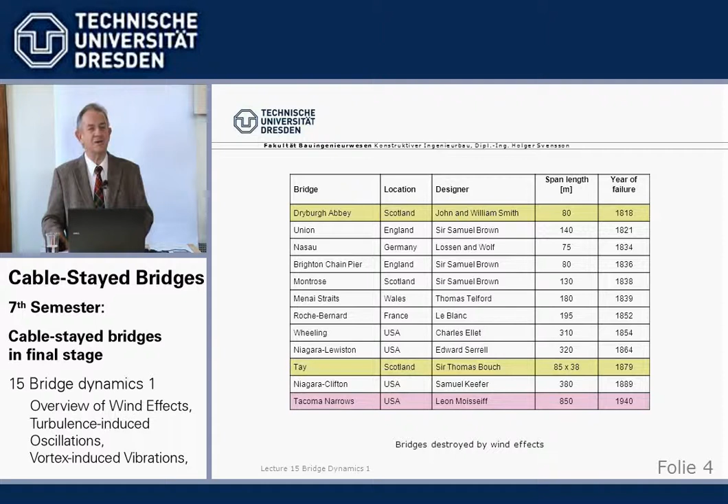So it all started with Tacoma. And to my amazement, in former years, I found out that you had never seen the famous movie of how the Tacoma Bridge in wind failed. I will show it to you again today.

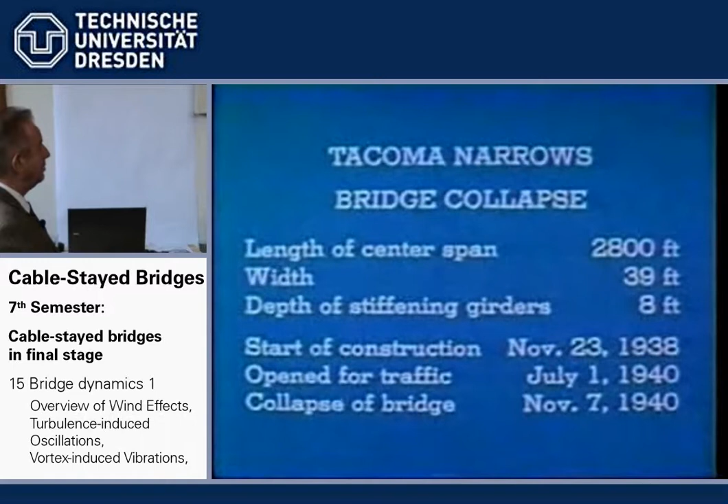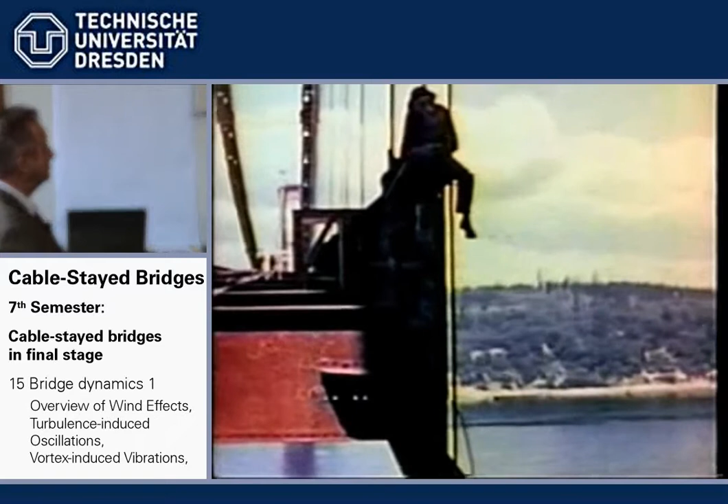At that time, it was one of the largest bridges. Steel girders, 8 feet tall, which were supposed to stiffen the bridge against the bending. However, some up and down vibration was observed during the entire useful life of the bridge, which was rather short. Here's opening day.

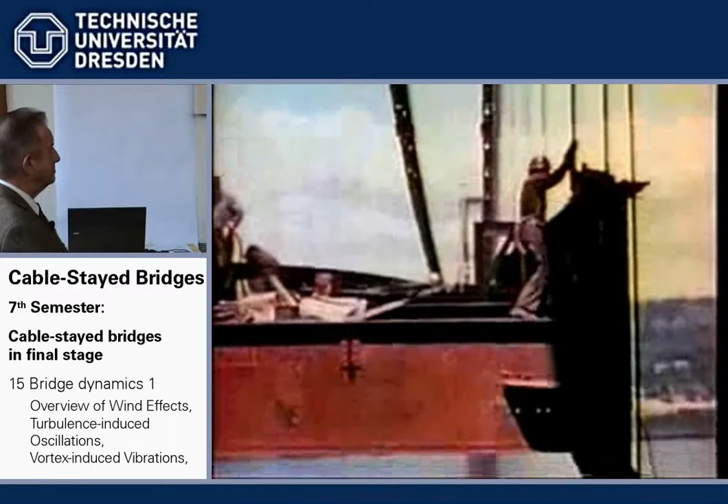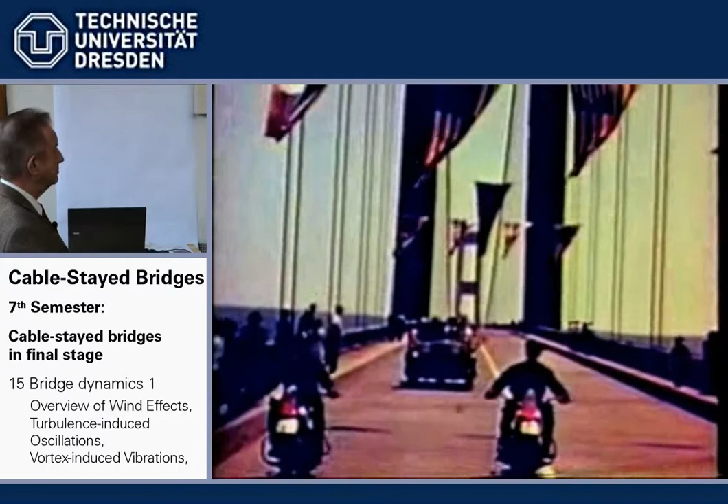Since the bridge moved from the very beginning in the wind, it was investigated by the University of Washington. Suddenly it went into a twisting motion, and there was a movie camera to film that disaster. The bridge oscillating in one of its natural modes of vibration with a period of 5 seconds.

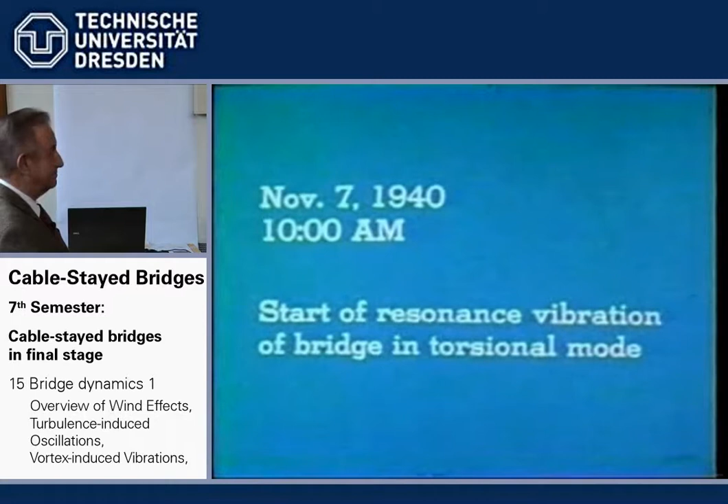Torsional galloping. You will hear about it later. But it's a real effect. It's nothing theoretical. Bridges can fail.

It's pumping more and more energy out of the wind flow into the bridge. With this flexible - this is photographed at normal speed. However, the collapse was inevitable after a little more than an hour of this.

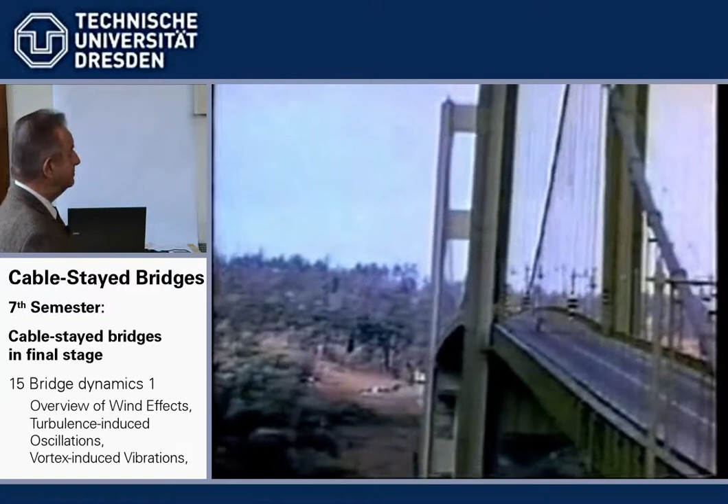And now the movement grows and grows beyond theoretically any limit, also, of course, beyond the structural strength. Had been abandoned earlier. No one was injured in the whole affair. However, a small dog in the car was frightened and was afraid to come out, and he perished along with the bridge.

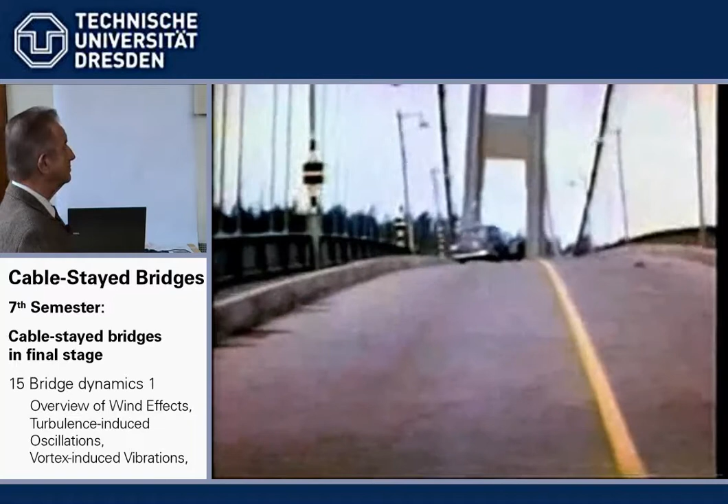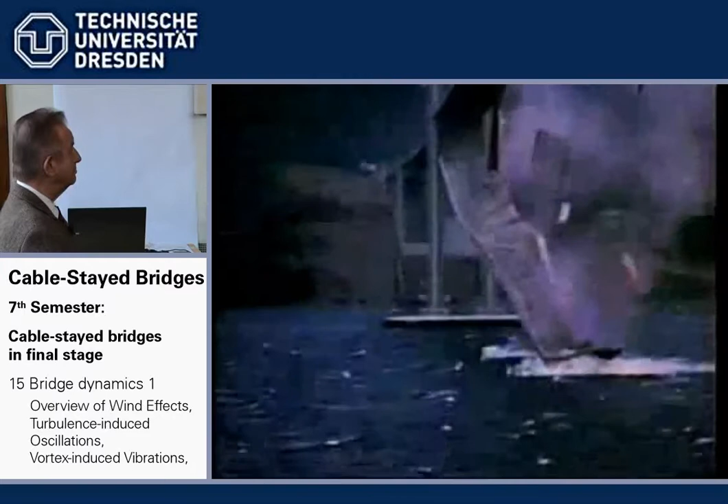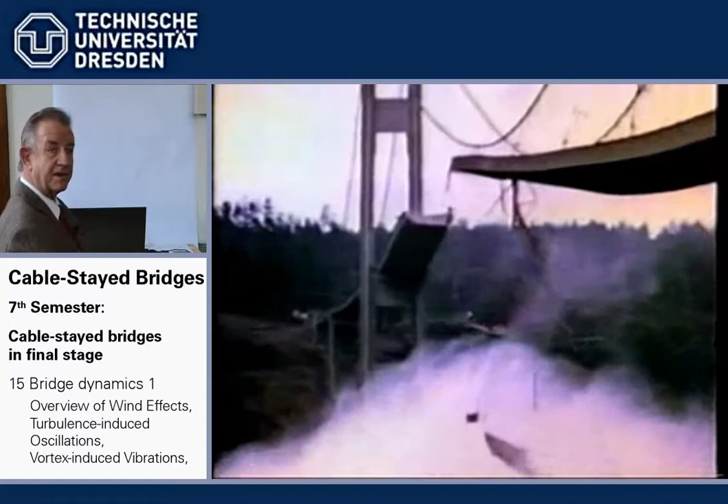Here we have seen what wind can do to a bridge. Rebuilt using a stiffening truss instead of girders, the new bridge is completely stable. So we have to take great care that this doesn't happen to our bridges. It's a real problem we are dealing with, not just some theoretical considerations. It's real.

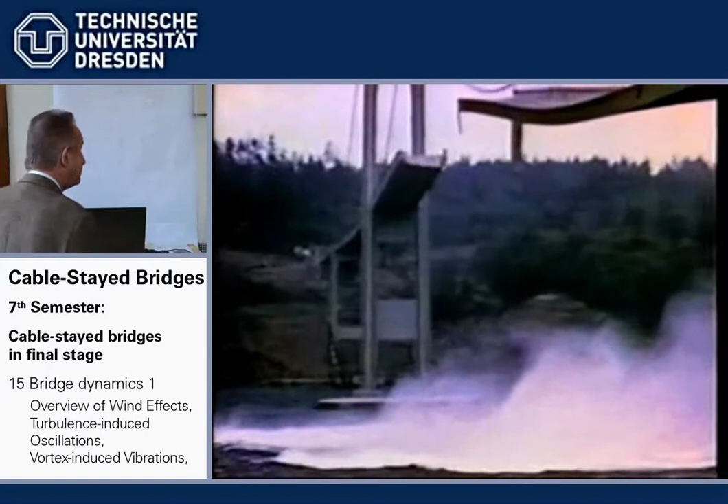Now we start with an overview of the wind effects. This is a very important slide, which we will show again, and you should try to remember. We have three different phenomena: turbulence, vortex, and what we call motion-induced, which we just had a moment ago. Turbulence-induced comes from random fluctuations of wind and wind speeds—just gusts—causing the bridge to move if it hits at the right moment.

The next one is periodic vortex. Vortices form behind a bluff body—Theodore von Karman found that out. And this periodic vortex shedding creates small forces, but over time they can also excite the bridge.

And the third, and the really dangerous one, is motion-induced, where the bridge beam and the surrounding air work together as a unit, thereby changing some characteristics of the bridge beam—be it the frequency or the damping. This phenomenon, for example Tacoma, is then like a stability problem similar to buckling. The movement of the bridge can go beyond all limits and can destroy the bridge. So: turbulence, vortex, and motion-induced, we say here.

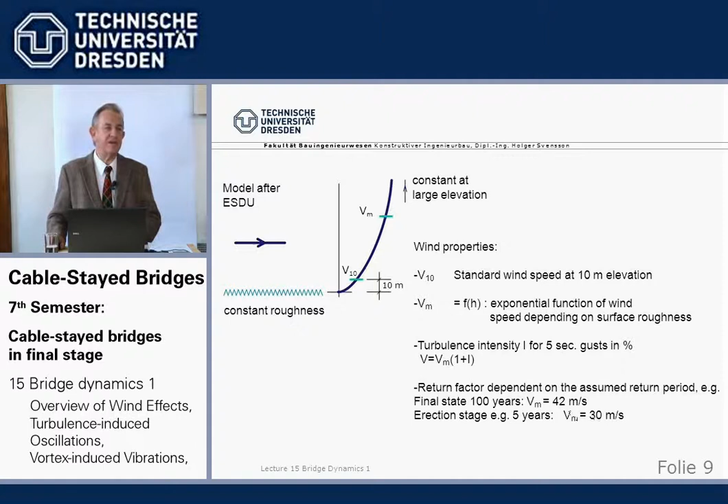So we have on one hand the wind blowing onto the structure, and on the other hand the structure itself reacting to the wind. The most important reaction is the natural frequencies, or eigenfrequencies. The most important is the vertical bending, which is typically here 0.25 Hertz, and for motion-induced dynamic effects, maybe even more important, the torsional eigenfrequency—especially the ratio of torsional frequency to bending frequency, which is important.

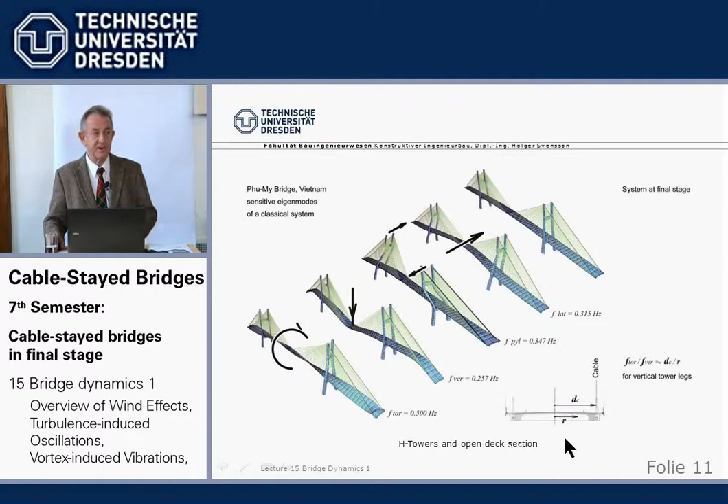We should have at least a ratio of 2 or even more to make it safe. If we have vertical tower legs and an open cross-section, then the ratio of torsion to bending is, as a first approximation, the distance of the cable plane to the torsional radius of inertia, where we thereby neglect the torsional inertia of the beam itself. So that's a very general assumption.

It's different if we have an A-tower. An A-tower increases the torsional frequency of the beam. How? We've mentioned it and calculated it, but I'll show it again. If we have a torsional movement of the beam with vertical tower legs, the tower legs move independently this way and that. Now if we combine the tower legs into an A-shape, they can't move independently, which means we eliminate the cable elongations of the backspan, and thereby we increase the torsional frequency.

This example shows that we have, on one hand, frequencies of 0.896 and 0.395, which gives a ratio of 2.27. However, if we just take the beam itself as shown on the last slide, that would come to only about 1.5. So we have an increase of 50% in torsional frequency by using A-towers instead of vertical towers.

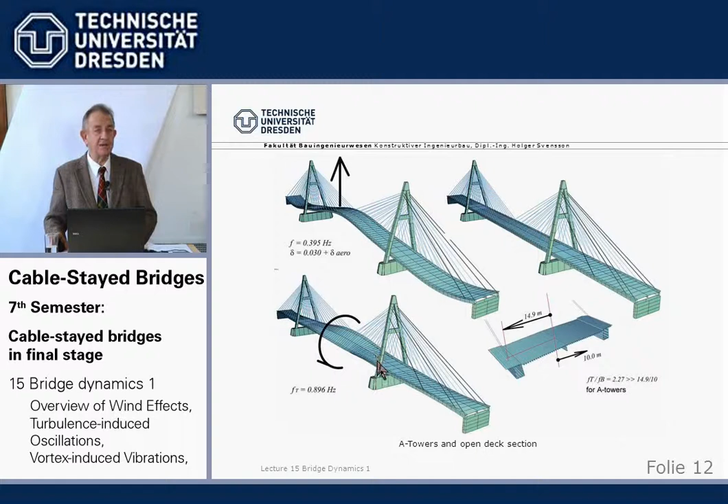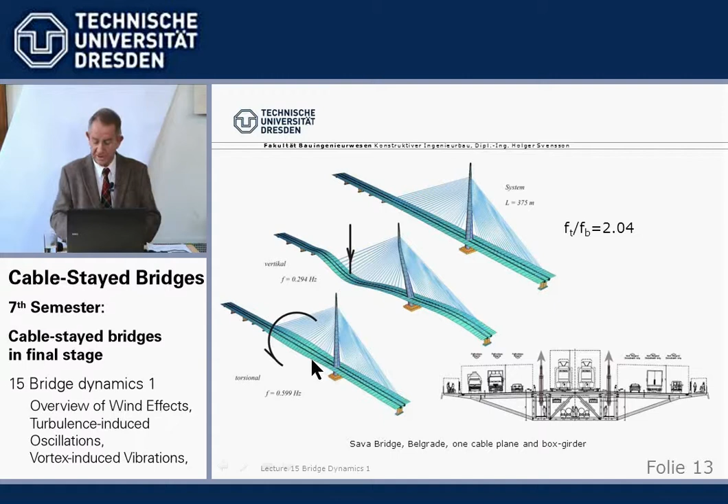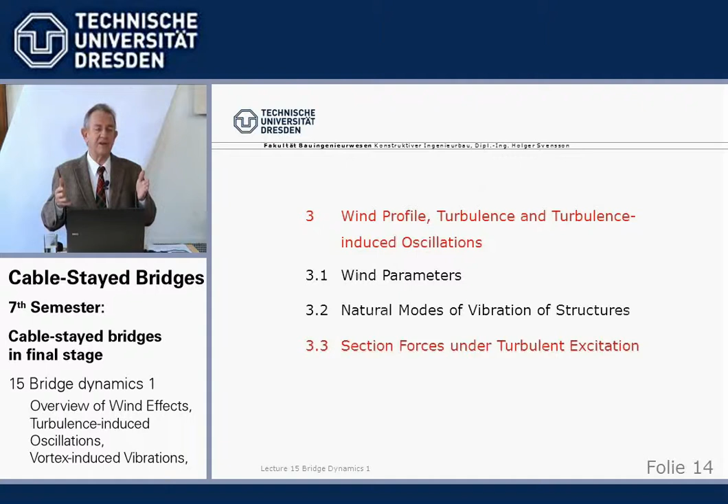Now we come to the first of the three phenomena: turbulent excitation, which means the bridge stands in wind and the wind blows with gusts, stronger and less strong, more randomly moving the beam. By moving the beam, strains and stresses are originated which, like any live load, we must calculate and ascertain do not go beyond the permitted limits.

As I said, turbulence-induced means just the wind gusts blowing and moving the bridge randomly. What forces are exerted by the wind onto the bridge beam? We can measure that by putting such a beam into the wind tunnel, letting the wind blow at different angles against it, and measuring the force exerted onto the beam.

First of all, we have the horizontal force, the drag - that's about 0.2 times the width, more or less constant for wind angles of attack. Then the wind tries to lift or push down the bridge; that coefficient changes strongly with the wind angle. If the wind blows from below, it tends to lift it up; if it blows from above, it tends the other way. Third, we have a torsional moment varying with the wind angle of attack. So we have these three forces acting on the beam from wind: horizontal (drag), vertical (lift), and torsion. For sizing a bridge, we mainly look at drag, but for dynamic phenomena, all three are equally important.

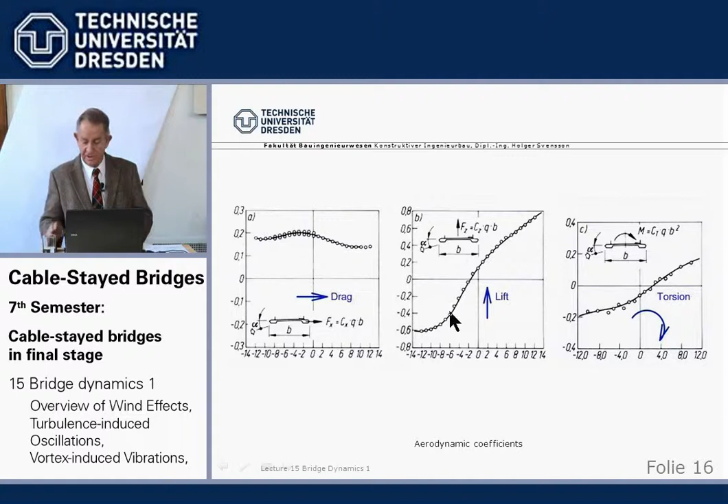One possibility to calculate forces under turbulent wind is to place a section model into the wind tunnel, dynamically supported on springs with the same eigenfrequency as the real bridge beam, scaled accordingly. We'll see that later on wind channel testing. Then we can measure how the beam moves - for example horizontally, as wind speed increases we get the vertical movement, lift, and the rotational angle.

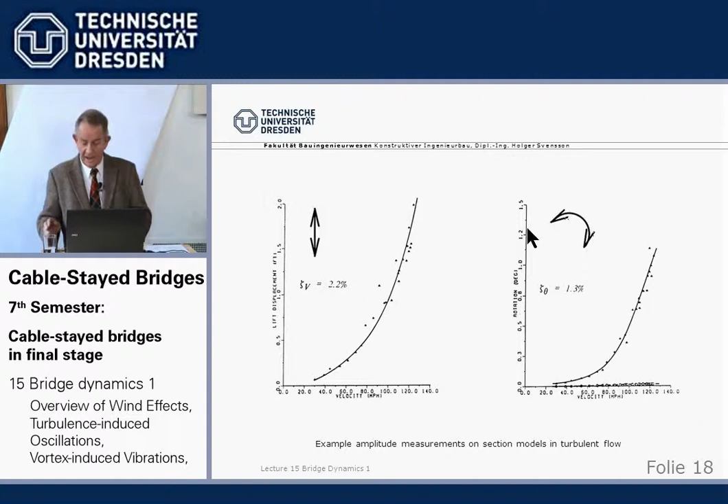When we have these values corresponding to the wind, we can calculate backwards what equivalent static loads would produce the same deflection of the bridge measured in the wind tunnel. That can be, for example, a constant transverse load for the base average mean speed, and then a variety of additional dynamic loads for the vortices. With a great number of loadings, we get an envelope of moments, and from that we can calculate the stresses.

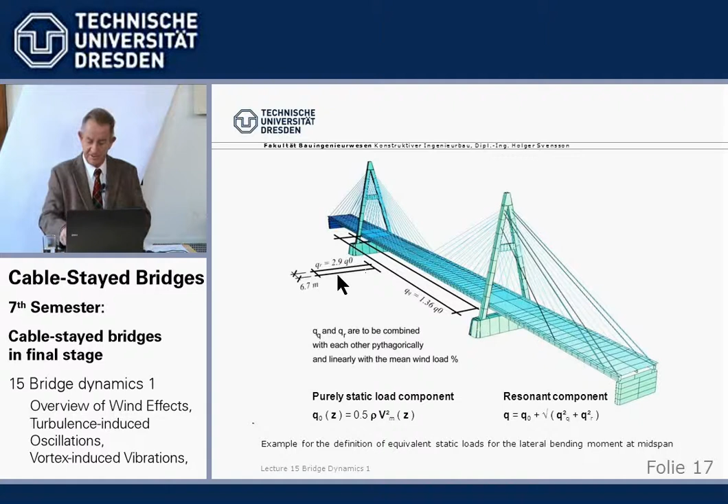That's basically Davenport's method. Today there's a more sophisticated method which Kovacs, for example, has developed, using an analytical approach. On one hand, the wind field with the gust characteristics as defined is created in the computer. Then we let this wind blow onto the bridge, which we have as a bridge model in the computer with the proper frequencies and so on.

We use the results from the wind tunnel with the part section model to let the computer find out what forces - lift, drag, moment - are exerted from this wind onto the structure. Then, as a result, we can directly get the moments out of the computer, so we don't have to recalculate backwards and forwards, but do it all by computer. Now we show a film of how this was done by Kovacs for the Helgeland Bridge, which had an extreme wind climate.

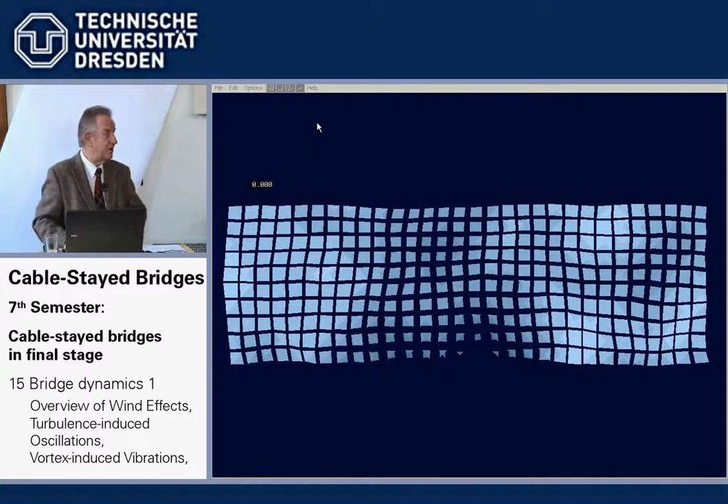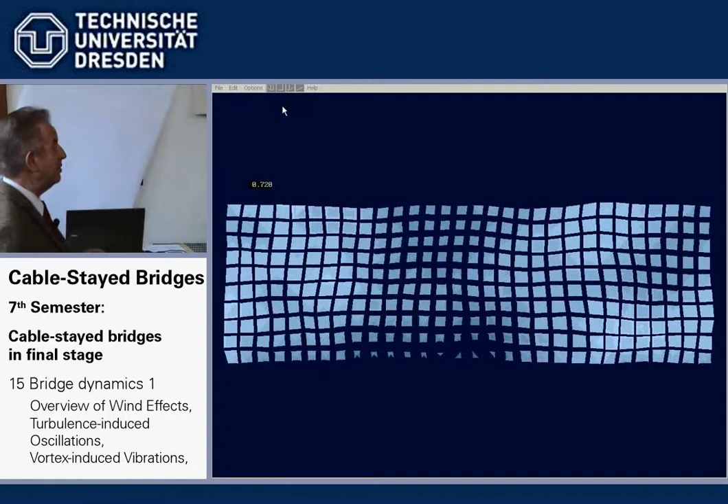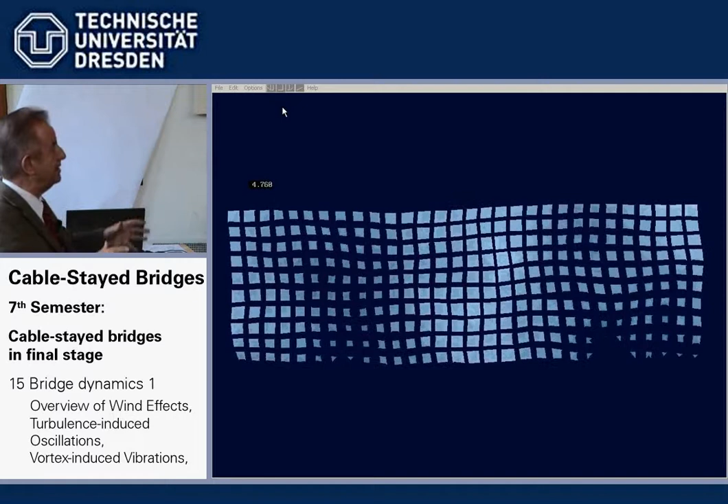Here we see first the generation of a wind field with the same mean speed and turbulence characteristics. It's a time history method, and normally there are 10 runs of a certain period of time which give all the variety mathematically possible in this wind field's speed and gust distribution. These are just short periods of time from various time history runs.

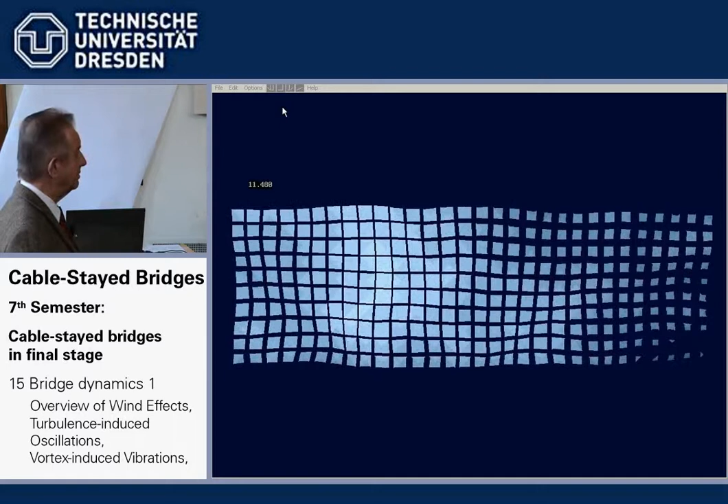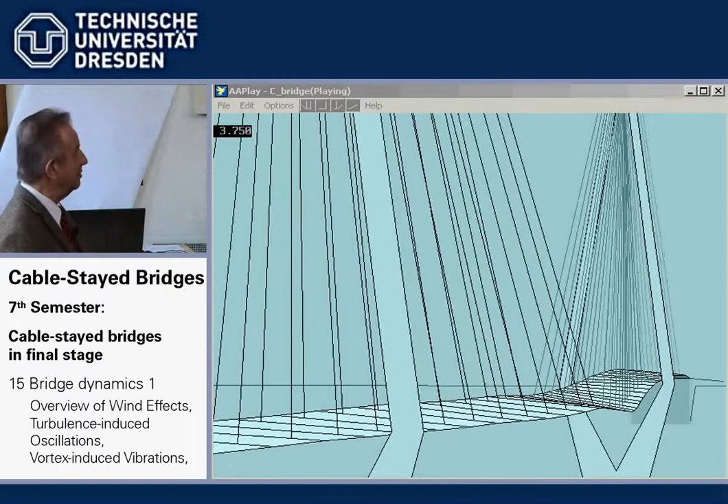Now we see the bridge as a computer model hit by this wind field, using the lift, drag, and moment factors derived from the wind tunnel. Later, with the Incheon Bridge, I'll show an example where we can find the beam coefficients analytically - there we don't need a wind tunnel at all. Here we use the wind tunnel to get these characteristics and apply them to the bridge. And here you see the movement of the bridge. I think that should do it.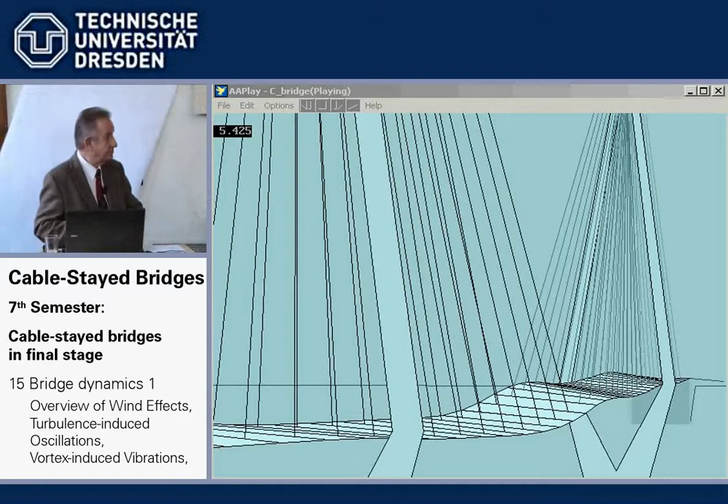Now the computer can give us a moment envelope, the biggest moment at any place from all these, say, 10 time history runs, and we can introduce nonlinear characteristics into the beam. For example, if we have cracked concrete, the stiffness goes down and the frequency changes, but the moments are also reduced. So all this has been done here with the Helgeland Bridge.

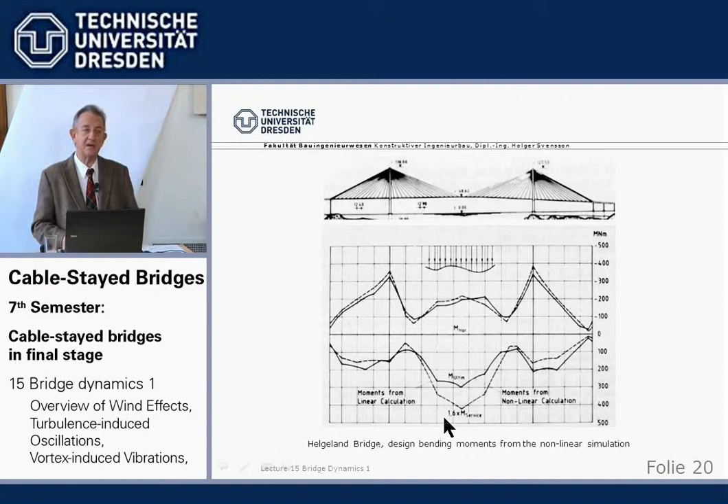We have the phenomenon of first order and the ultimate stage with cracked and uncracked sections. So it can happen that due to the cracking and reducing of restraint moments, the nonlinear or second order moments are smaller than those linear with uncracked sections. This is an excellent result which enables us to check that the wind stresses are not bigger than those from live load, and are within the permissible range.

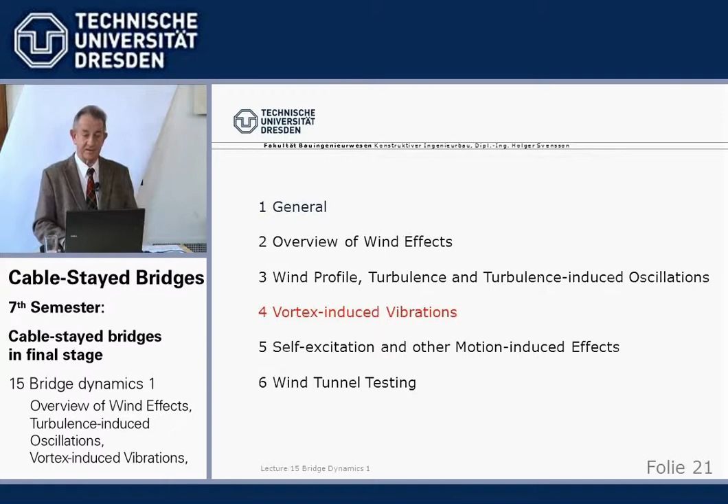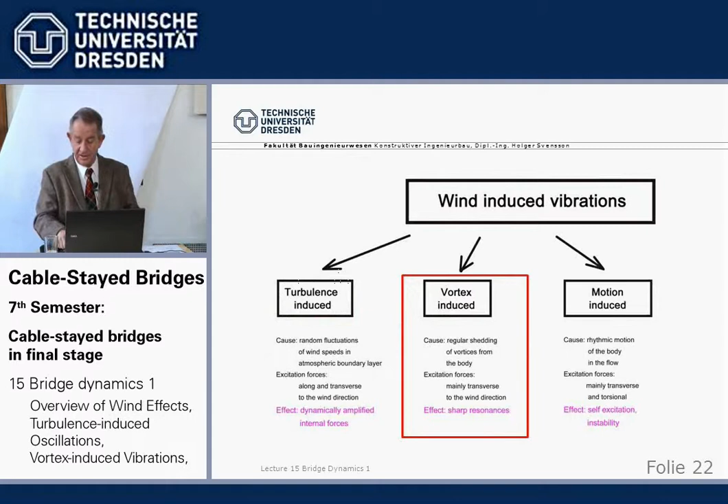Now the next one we talk about is vortex. Vortex induced, we have a regular vortex shedding, and if the frequency hits the beam frequency, if it's in phase, if it's resonant, then we may have a rather big movement.

Now what happens? If we have a wind blowing on a pipe, then we have this shedding of vortices upwards, downwards, upwards, downwards, and the frequency is defined by the Strouhal number: wind speed divided by the characteristic depth or width, times Strouhal, 0.2 for a pipe. We see it, for example, at lamp standards, where we have steel pipes holding up a lamp on a parking lot. And there you can sometimes see it vibrates - that's vortex shedding.

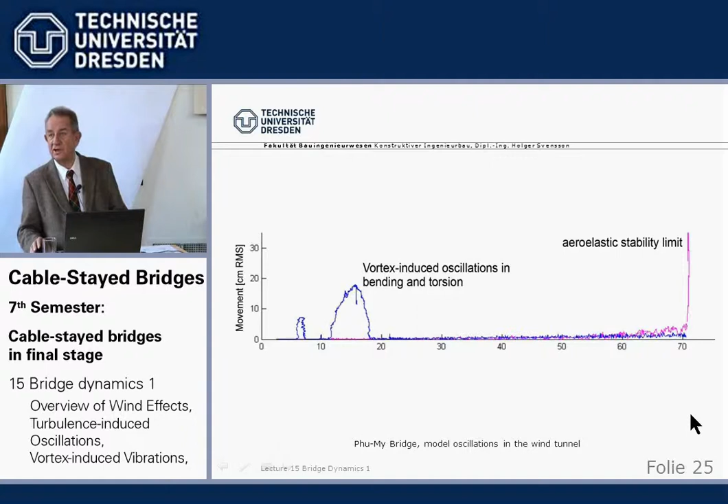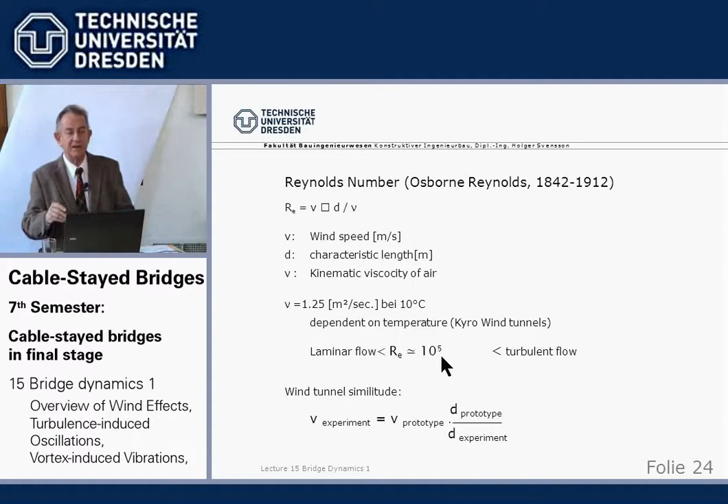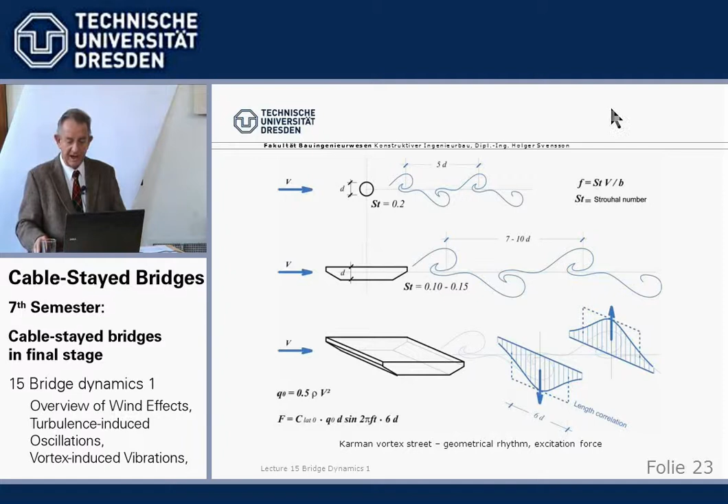So don't get all excited when you have a resonance phenomenon in the wind tunnel. Just consider carefully - maybe it will not show up in reality. With my bridges, that always happened - we never had to do special damping or so for vortex shedding, although the wind tunnel showed up that there may be a problem. But it's the difference between real wind and wind in the wind tunnel.

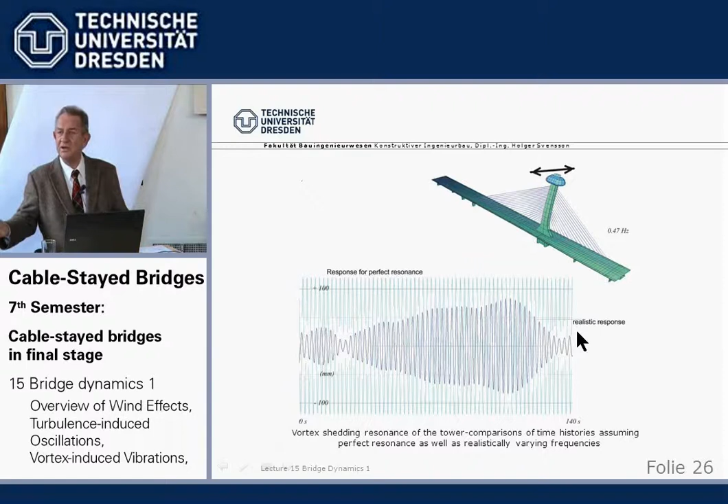Now, this was our first lecture where we investigated the first phenomena, turbulence and vortex. The next part we will go into the really dangerous one, which is the dynamic self-excitation.